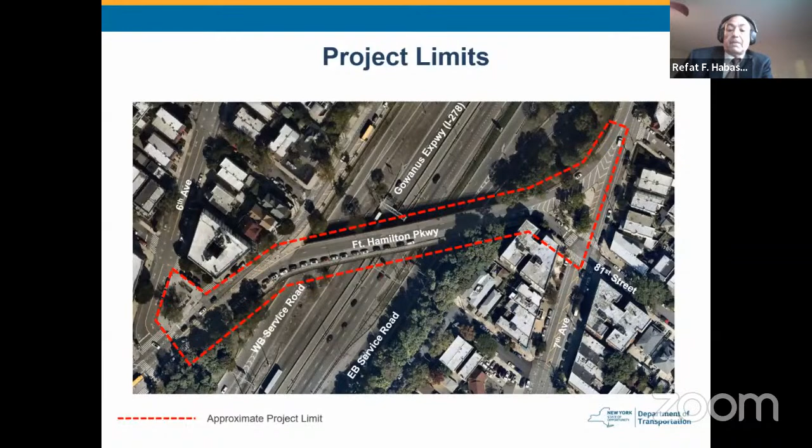Next slide, please. Now, Pakso will go over the project needs and highlight the deteriorated elements of the bridge. Thank you. Thank you very much, Refat. Good evening, everyone. Once again, I'm Pakso with Stantec, and on this project, I'm the structural engineer. Let me first get into the project needs.

As Refat and Delia mentioned before, this bridge was built in 1964. It's a steel bridge with a concrete deck. Let me first get into that deck. It's a structurally deficient concrete deck, which really has exceeded its useful life. As you can see from photo 1, this is a pretty typical photo of the underside of the deck. It exhibits many areas with scaling, large spalls, where you can see the exposed rusted rebar.

As you keep working down now, below the deck is the steel beams. The steel girder ends, many of them are heavily deteriorated, along with their bearing stiffeners and bridge diaphragms. You can see in photo 2 there that many of those girder ends are really heavily rusted to the point where the steel has disintegrated into these large holes. Also, on one of the spans, the bridge member has taken some impact damage. Okay, next slide, please.

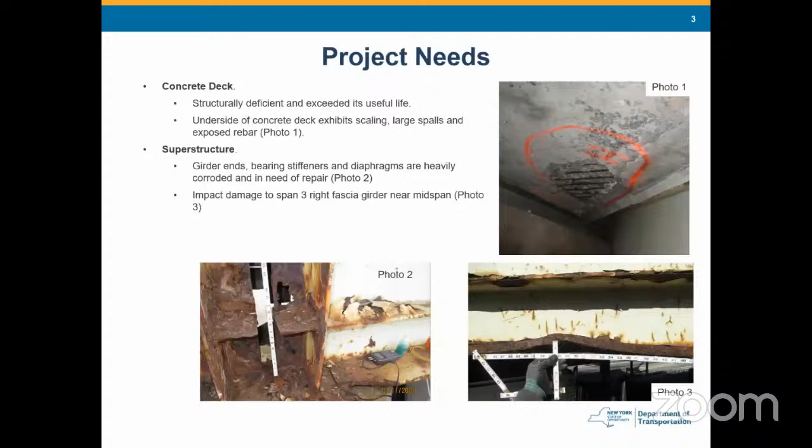So as you keep working down below the beams, you have the bridge bearings. You see there in photo 4, all the bridge bearings are really heavily rusted and there's surface corrosion throughout. And on the bottom 2 photos, if you keep going down below the bearings now, you're at the pier substructure. There's columns that have heavy section loss where you see the rebar. Photo 6 there is that cap beam and the pedestals, a lot of corrosion. So that's the project needs for this bridge. Next slide, please.

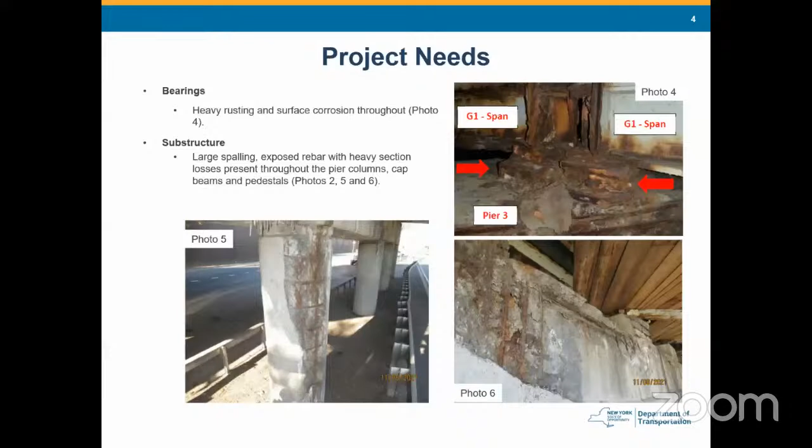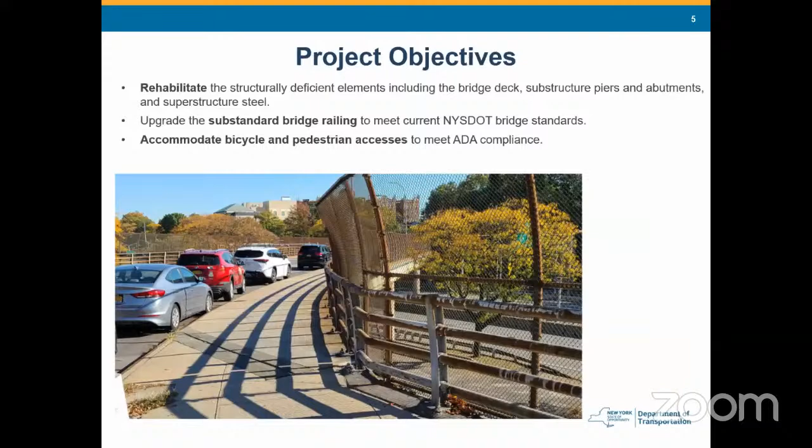Now I'll talk about the project objectives. First, we want to rehabilitate the structurally deficient elements that you saw in the photos before, including the bridge deck, the substructure piers and abutments, as well as the bridge steel. We want to upgrade the substandard bridge railing to meet all modern-day New York State DOT bridge standards. And thirdly, we want to accommodate bicycle and pedestrian access to meet ADA compliance. Next slide, please.

Now let me talk about the proposed improvements. The bridge deck and approach slabs are going to be removed and replaced under this project. The superstructure steel beams, we propose to replace them with brand new metallized steel. All the piers will be replaced with brand new piers that have wider pier caps, full height pier walls, new concrete pedestals and footings. We propose to repair the existing abutments, including pedestals, bridge seats, and back walls. All those rusted bearings are going to be replaced with brand new modern elastomeric bearings.

And we're going to eliminate as many joints as we can with the use of link slabs or using continuous spans. We're going to replace the existing bridge railing with new upgraded concrete parapets that satisfy the latest New York State DOT standards. We're also going to provide for operational and safety improvements by reconfiguring the travel lanes to add a protected bicycle lane while maintaining the existing parking lane. And finally, we're going to upgrade the street and underdeck lighting. So with that, I'm going to pass the presentation over to my colleague, Chris Coogan. Chris?

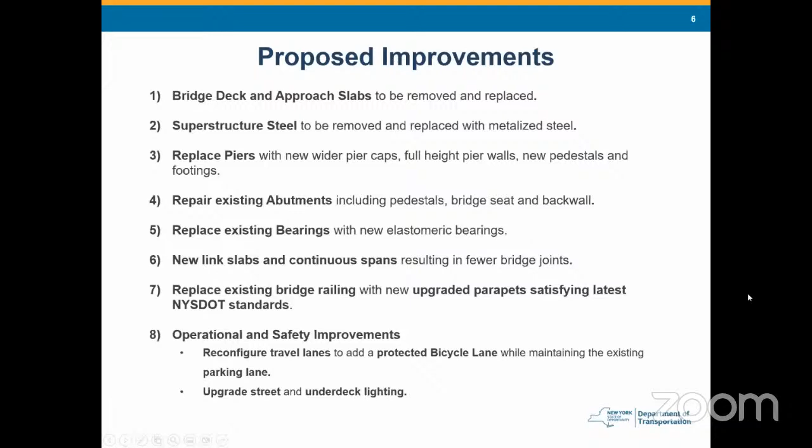Thanks, Bob. Thanks, Refat. Thanks, Delia. My name's Chris Coogan, and I'm the lead civil engineer for the project. So here on this slide, we have the proposed plan view of the Fort Hamilton Parkway Bridge, along with the approaches on the east and the west side of the bridge. On the approaches, we'll be doing some mill and overlay, resurfacing, and also some restriping of the existing roadway. We'll also be, as Refat touched on earlier, doing some landscaping improvements to Tom McDonald Triangle on the west side of the bridge and Coffey Square on the east side of the bridge.

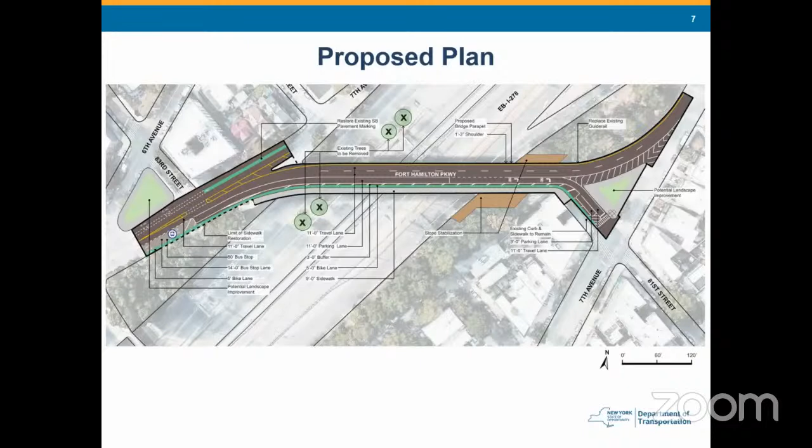As far as the bridge itself goes, the new bridge will have 2 travel lanes, along with the parking/right turn lane, the right turn lane on the east side of the bridge approaching 81st Street and 7th Avenue. And we'll also have a new protected bicycle lane with a buffer between the bicycle lane and the parking lane on the southern side of the bridge, along with the pedestrian sidewalk that will be rebuilt as part of this project.

So this slide here represents a cross-section view, very similar to the previous slide. The top one being the existing cross-section, which I just talked about. And the bottom cross-section represents the new bridge. It's very similar to the existing bridge, but a little bit different. Again, we have 2 travel lanes. We'll have that parking/right turn lane. And then we have our buffer and protected bicycle lane toward the south side of the bridge, along with the pedestrian sidewalk.

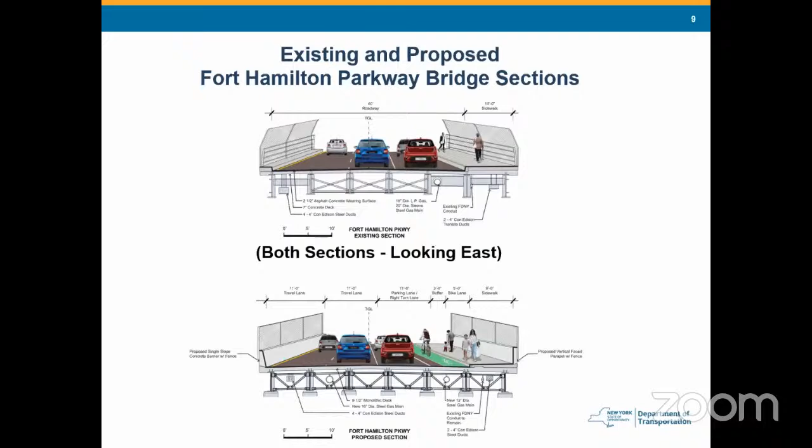So during the course of this project, we'll be coordinating with various agencies, including utility companies such as National Grid, Con Edison, the New York City Fire Department, and New York City Street Lighting. As previously mentioned, we'll be upgrading the existing street lighting on the bridge itself. Other agencies we'll be coordinating with are, of course, New York City Parks for Coffey Square and Tom McDonald Triangle on each side of the bridge.

We'll also be coordinating with MTA buses, which I'll discuss on a slide coming up very soon. We'll be coordinating with New York City DOT and OCMC for the work zone traffic control for this project, and also New York State DOT and MTA ITS. There's existing ITS on the Gowanus Expressway that will be maintained and protected during construction.

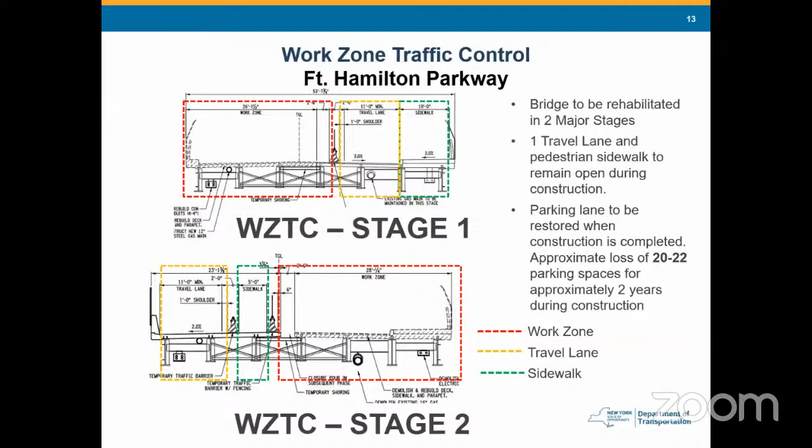Okay, so previously I mentioned MTA buses. There is an existing B16, B70 bus stop located on the eastern side of the bridge. It's actually on the bridge itself. And this bus stop is going to be temporarily closed during construction. There are 2 nearby bus stops, one at 83rd Street on the west side and one at 79th Street on the east side. These will both remain open during construction for customers to utilize.

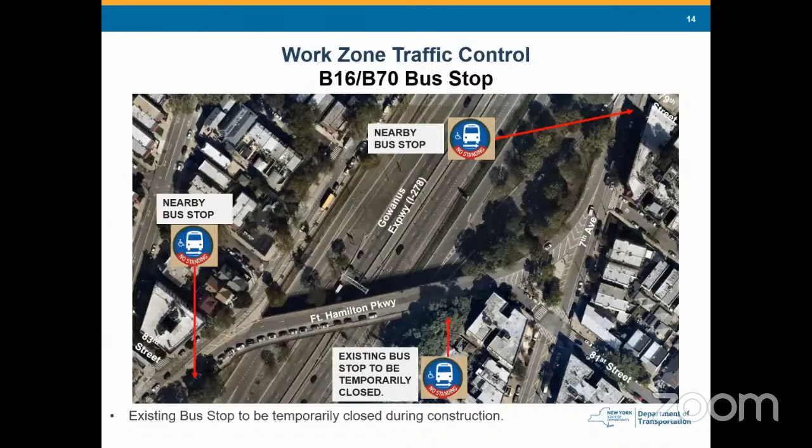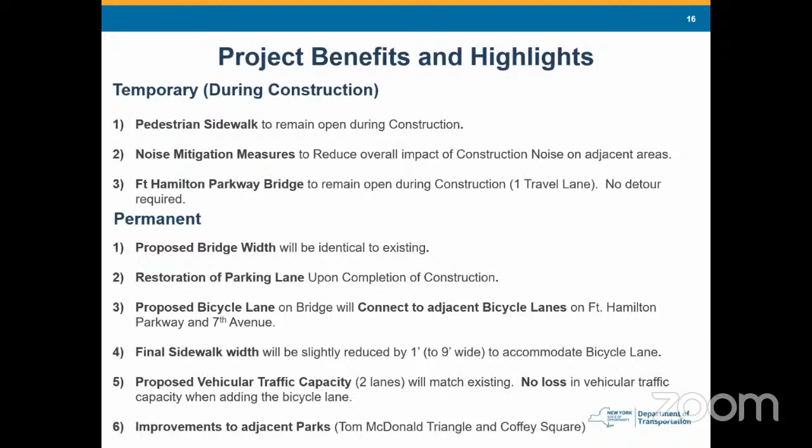And last but not least, we'll be coordinating with New York City Parks to incorporate some improvements to the Tom McDonald Triangle and Coffey Square. And on that, I'll turn it back to Rafat for any questions that you may have.

Thank you so much to everyone from the DOT for a very thorough presentation. I know that overpass well. It's a main artery from Bay Ridge into Dyker Heights, so definitely in need of upgrades. Do we have any questions from the committee? We do. Steve, yes, go for it.

You got me? Yep. Okay. First of all, I want to just tell everybody that I was actually there when they opened the existing bridge. And I'll tell you, I hope my girders are holding up better than this one. So I have a few questions.

This whole bridge is going to be the same width as the current one? Yes, it will be the same exact width. And we'll have 2 travel lanes, 1 parking lane, and a sidewalk. And then the new addition will be the bike lane that connects to the existing bike lane east and west of the bridge.

Yeah. And in the picture, there seems to be, between the bike lane and the sidewalk, an empty space there. Am I wrong? Could you put the picture back up for 1 second? I'm sorry, I stopped the share so we could see you. If you could put that back up. Certainly. Give me 1 second. I'll get it right back up there. Sorry. No, it's totally fine. Of course.

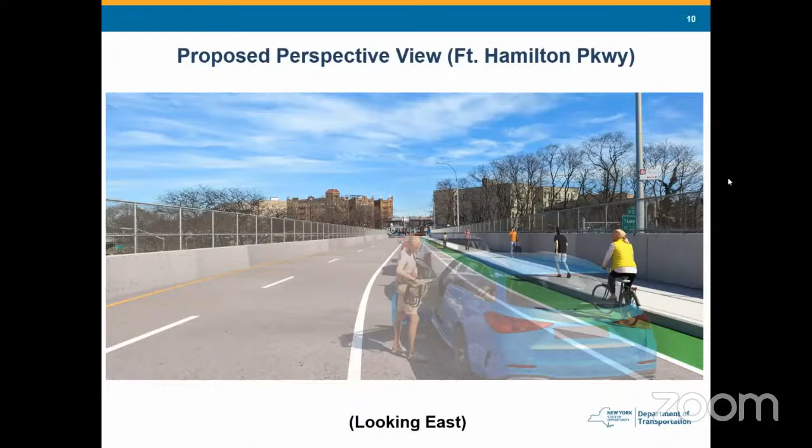Chris, I think this is on the next bridge too, right? That's correct, yes. The 79th Street Bridge. Yeah, and this is pretty typical. This is the New York State DOT standard now, either the single slope when it's next to traffic, or the vertical face, which you'll see on the right side, which is adjacent to the pedestrian sidewalk. Got it. Thanks. Thank you.

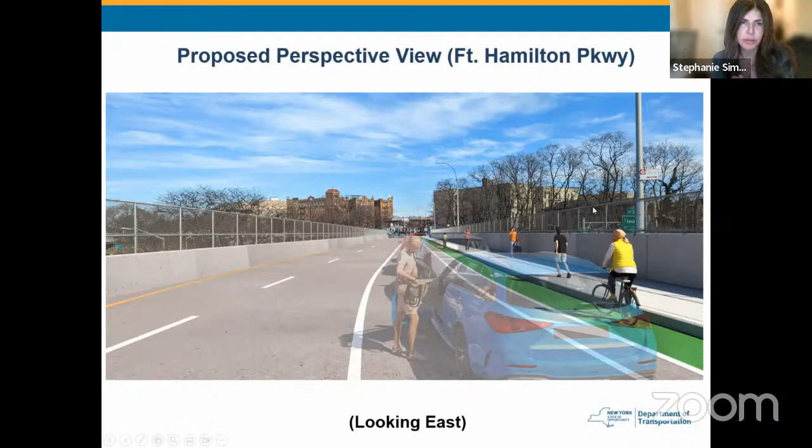Stephanie? Oh, sorry. Yes. I was curious if you could remind me, where does that bike lane empty out to? Which way will the bikers turn? Will they go left? Will they go right? I'm going to go back to the plan view here. So the bike lane is going to connect to the existing bike lane over here on Fort Hamilton Parkway. It kind of comes to an abrupt halt over here. It does continue, I think, onto 6th Avenue, but it does not continue further north onto the bridge itself.

And there's also an existing bicycle lane on 7th Avenue. So bikers will be able to either turn to the right or to the left, continue to the north or to the south. Okay, and then the cars will be moving. I'm just trying to get the direction of the cars. One of the things I've noticed in areas where there's a protected bike lane, the parked cars obstruct the view of the cyclists if you're trying to make a turn.

I don't know how that can be addressed or if that will also be a problem here, but it's a dangerous thing. I've had that problem when I've been making turns and I have to stop and look behind me several times to make sure a cyclist doesn't come flying through the bike lane because either trucks are parked there or very tall cars. Is that a consideration here?

That's actually a great question, Stephanie, and this is something that we're trying to incorporate more on our projects. So what we typically try to do is incorporate some daylighting where you have those blind turns that you talk about, where a car is blocking your view, whether you're the cyclist or a car at these intersections. So what we've done here, and we're not fully through design yet, is we've incorporated a buffer area here in order to prevent cars from being parked in that location.

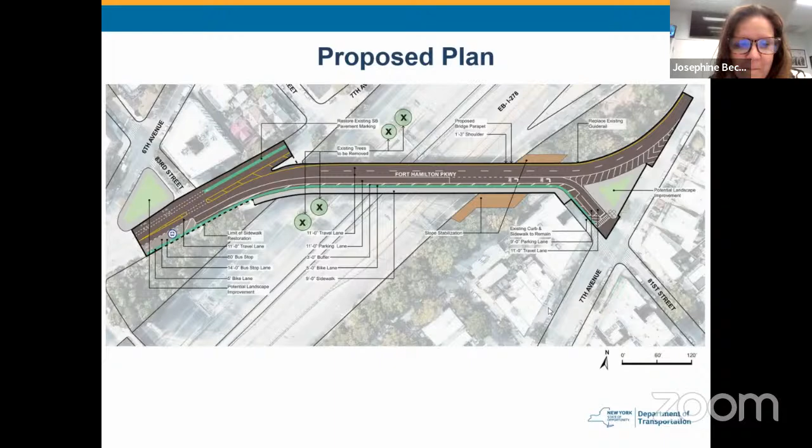Rafa, you want me to take this one? Yeah, you can take this one, Chris. Go ahead. We haven't specifically gotten into traffic agents in particular. What I can say is we have done some traffic analysis of the bridge itself and looked at the traffic volumes. You'll notice that the bridge approach is actually one lane, and once you get onto 7th Avenue, it's also one lane. So the bridge going down to one lane during construction shouldn't be too big of an impact.

As far as the Gowanus Expressway goes, we understand how heavily trafficked it is, along with the importance of that HOV lane. The HOV lane will remain open, it will not be impacted, and we are not implementing any long-term single lane closures on the Gowanus Expressway itself. Okay. During times when there is an accident or an issue, we are gridlocked, and that one becomes a choke point as a way to scurry around town by those familiar with the area.

My second question has to do with a very big time of year here in Community District 10 during December, and that's Dyker Lights. Yes, that was going to be my question. This overpass is very heavily utilized, and so is the general area. Is there a holiday embargo typically used by New York State DOT during construction? And if not, could one be considered here?